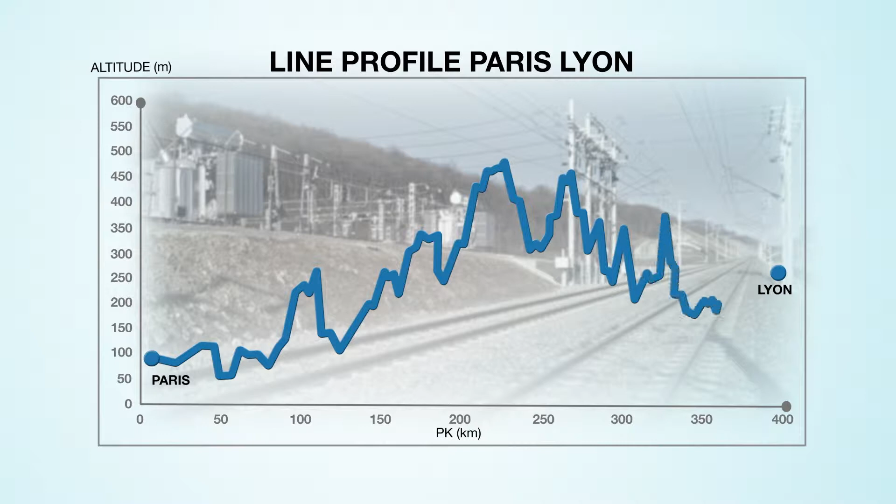French Railways wish to increase the capacity of high-speed line 1, which is between Paris and Lyon. One of the difficulties is that the public power system is weak at the crossing of the Morvan, roughly halfway between Paris and Lyon, and it's not reasonable to build a new substation where the increase of capacity will need it. We wish to increase the capacity of the line from 13 trains per hour to 16 trains per hour, an increase of roughly 3 trains per hour. We hope that better management of the energy available will allow this increase of capacity.

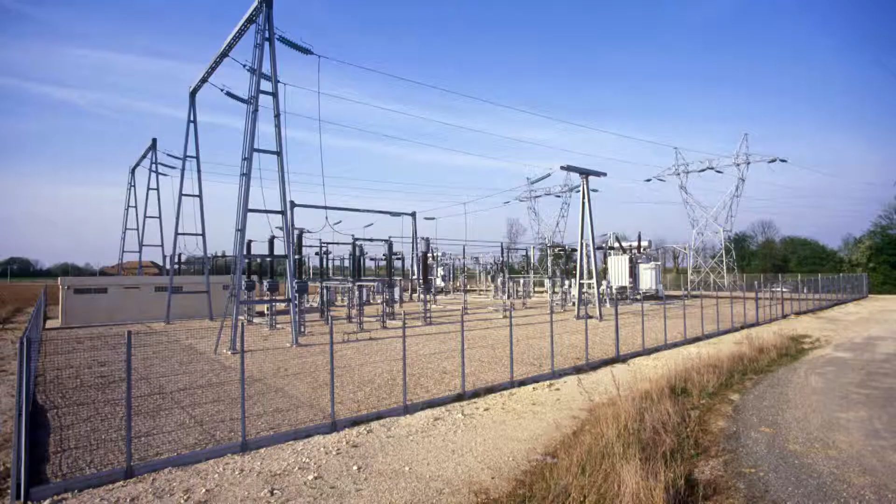A better management is first to use substations with a storage system. The substation will store the energy during the night and reuse the energy stored during peak hours. The second track is better use of the energy available by monitoring the speed of the trains, which will smooth the use of energy. So this is the problem that we address to MERLIN.

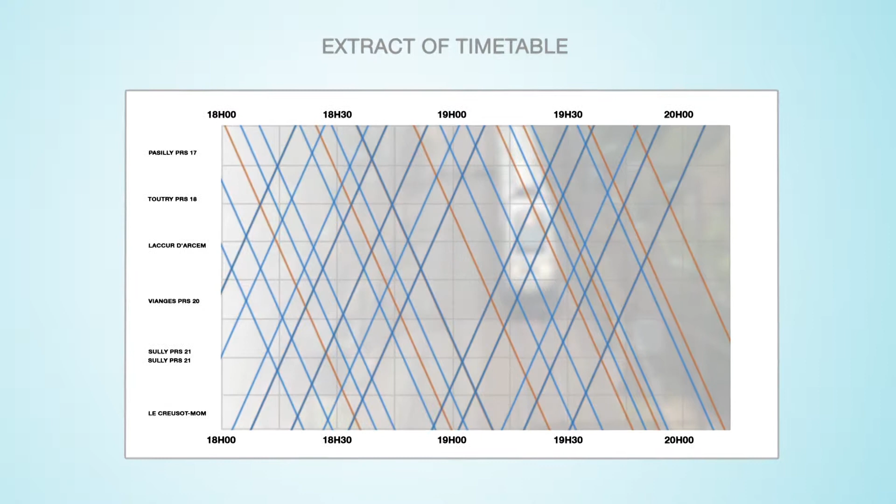The first solution is a software solution which aims to shift a complete timetable of trains in one direction in order to avoid accelerating different trains at the same time. This aims at reducing power peaks and power at substation levels. The second solution is also a traffic management solution using an ATS, automatic train supervision system, which solves conflicts between trains, for example avoiding braking, stopping and accelerating. There are significant benefits when we avoid a train stopping.

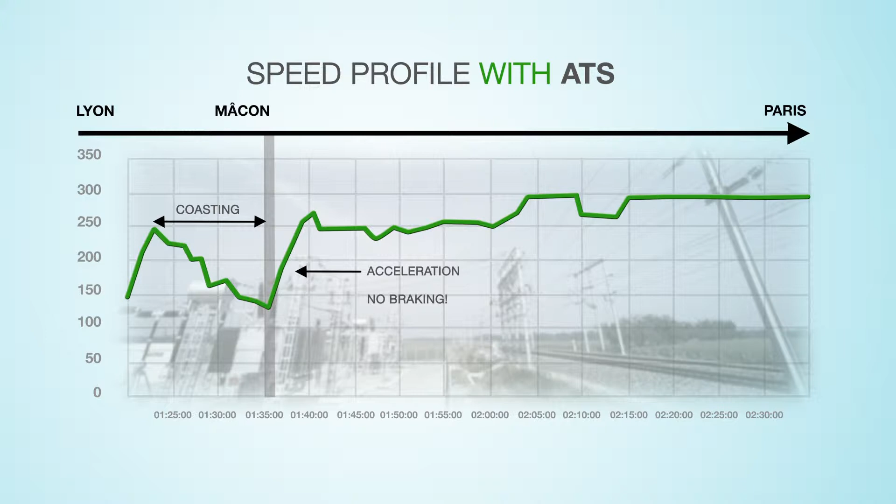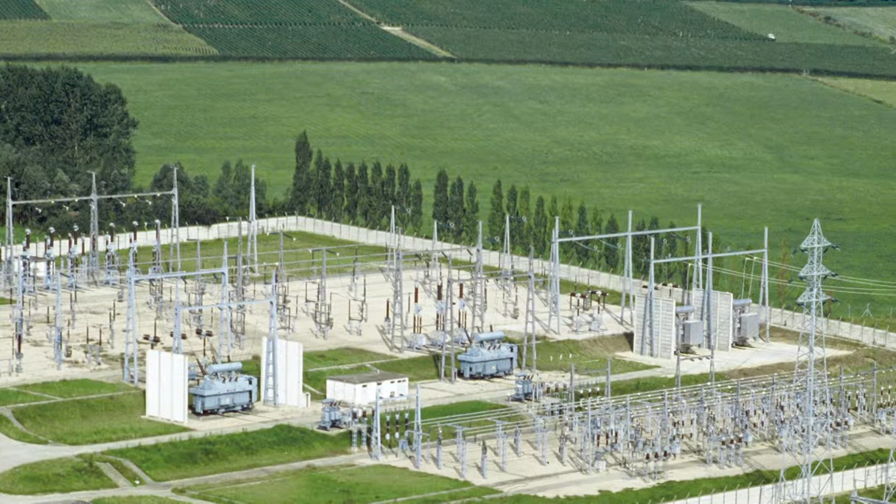The third solution is a hardware solution with the modification of existing substations, adding alternative energy sources like renewables or adding energy storage systems. For example, when we store energy during the night, we can re-inject it into the railway power system in order to reduce power consumption during rush hours. Finally, the three solutions can be combined in order to minimize the energy consumption and reduce power peaks, and thus increase the line capacity.

We are looking at two different problems in MERLIN. The first one is about minimizing losses in the rail power grid. We are examining a line between Malmö and Alvesta in southern Sweden. It's a double-track line with quite heavy traffic, daytime mainly passenger traffic, and during night freight traffic. There are 3 converter stations on the line, and we are seeing that these converter stations are not just feeding the trains near the station, but also over longer distances. This causes losses, and energy costs money. So by changing converter parameters, we hope it should be possible to minimize the losses, and that will be done by simulation by Siemens.

The other line we will look at is from Malmö to Simrishamn with a converter station in Ystad. This is a single-track line with quite heavy suburban traffic. EMUs used on the line have quite high installed power, so we get very high power peaks. But these power peaks are just a couple of seconds long, and the idea is if it is possible to shift these power peaks just a few seconds earlier or later, we can maybe reduce the peaks by 30% or so without affecting the timetable. This way we are hoping that we can lower our investment costs. This will also be done by simulation, and there we will see if it is possible to do that without affecting the trains.

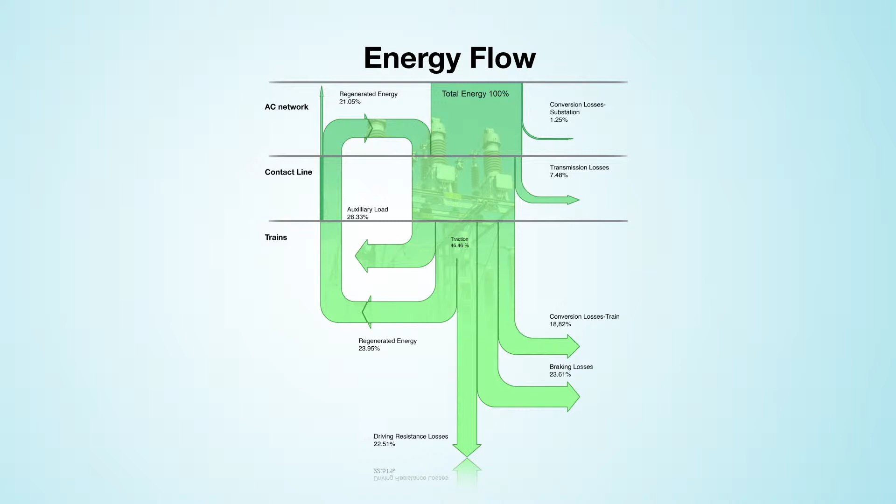For the second task, where we should look if we could reduce the power peaks of the system, we had 2 approaches. One approach was to modify, let's say, the train starts, the departure time of the trains, and the second was to alter the driving profile of the trains, taking into account not to shift the timetable. We already have preliminary results. Power peaks in the substation could be reduced by approximately 20%.

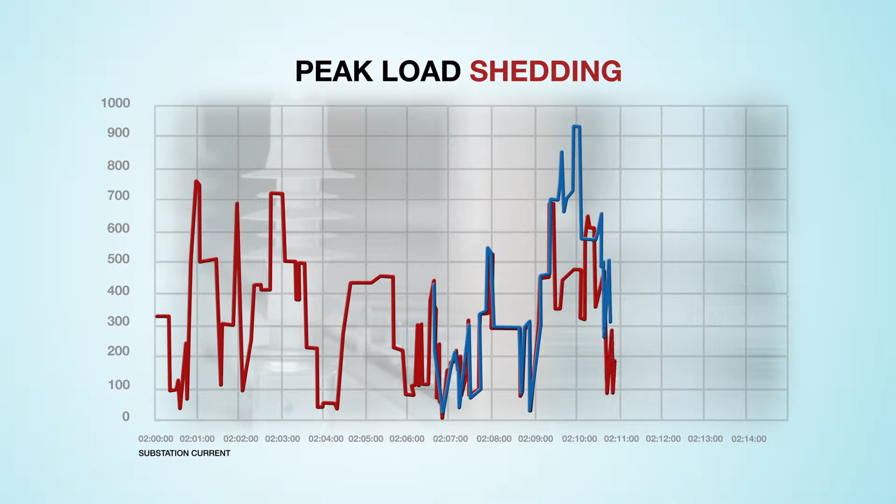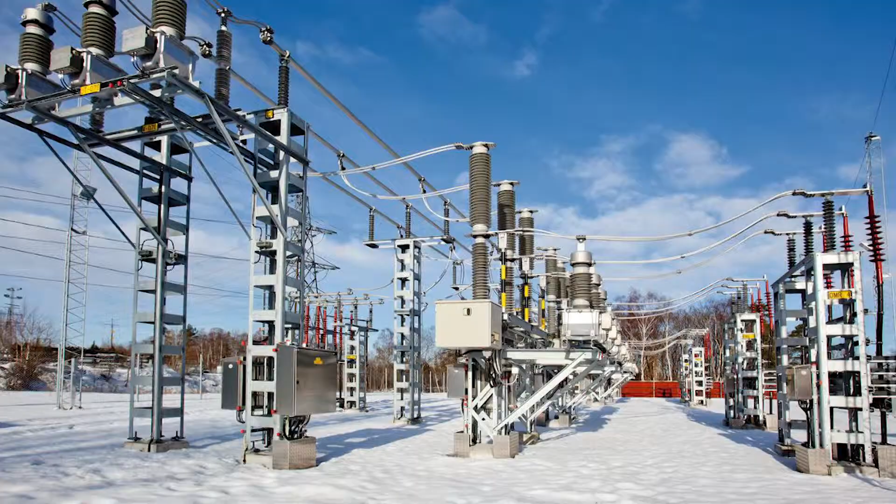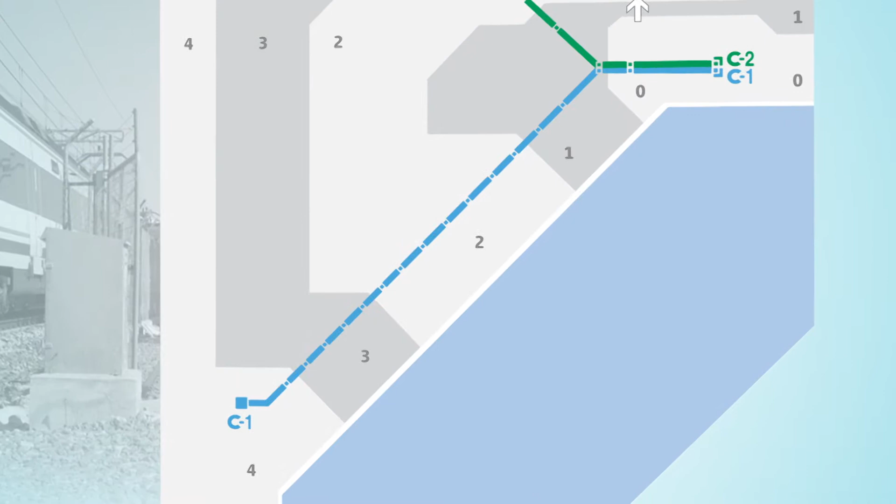The Spanish scenario is formed by 2 different lines. The first line, between Malaga and Fuengirola, is a 30 km length line with single and double track for suburban traffic. The line is fed by 3 electrical substations. The trains, type Civia 464, circulate in a single composition with frequencies of 20 minutes. The first line has 18 stations along 30 km, so trains must stop several times during the journey.

As a result, 2 problems in normal and degraded operation arise. On the one hand, a great possibility to recover braking energy. The problem is that many sections of the lines are single track and the frequency of trains is low. The direct consequence of this is that the energy is not used and must be burned. This line has both single and double tracks. Single tracks means complicated operation because all trains have to be synchronized. Being or not being synchronized has an important effect on the energy consumption.

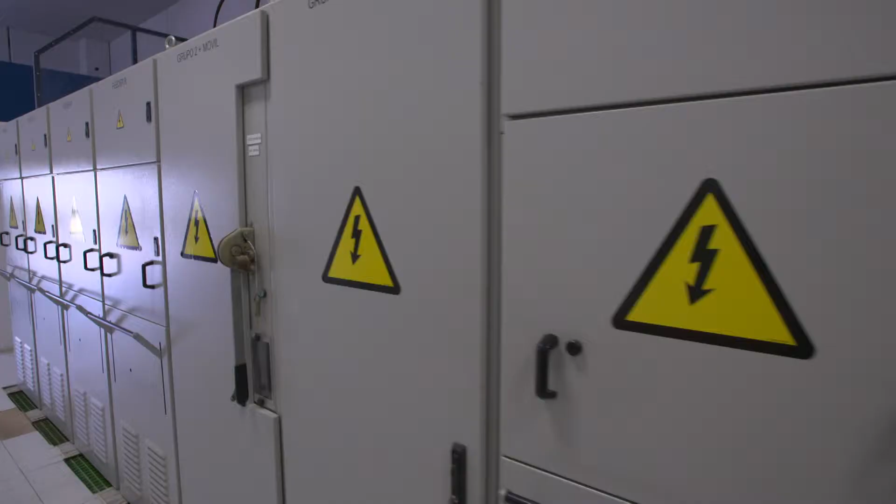Other common problems are the peaks of consumption during the starting of the degraded operation, therefore having terms of contracted power very high and also at a high cost. Therefore, it is necessary to analyze the possibility of placing a storage system in order to reduce, even in degraded condition, those peak loads and also to know the most efficient use of the recovered energy. Another important issue to analyze is the possibility of minimizing the terms of contracted power to reduce cost. That means a direct saving in the energy bill.

MERLIN provides us two relevant tools to solve the issues and fulfill the needs of the suburban scenario of Malaga, namely a strategic decision-making tool and the REMS, the Railway Energy Management System. From the strategic point of view, it was determined that the deployment of energy storage systems could help to reduce the energy consumption, power peaks, and even the contracted power. The strategic decision-making tool was run to find the best combination of a number of design factors, like the energy storage capacity, its location, and the cost, to obtain the optimal results.

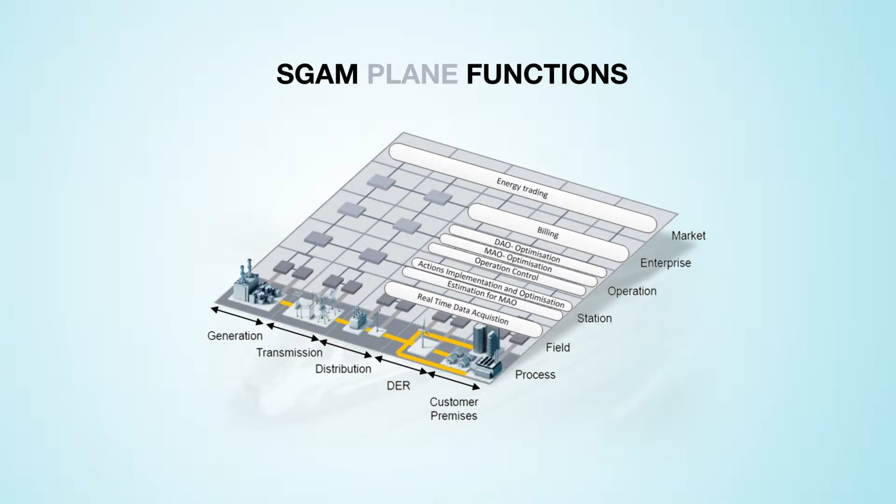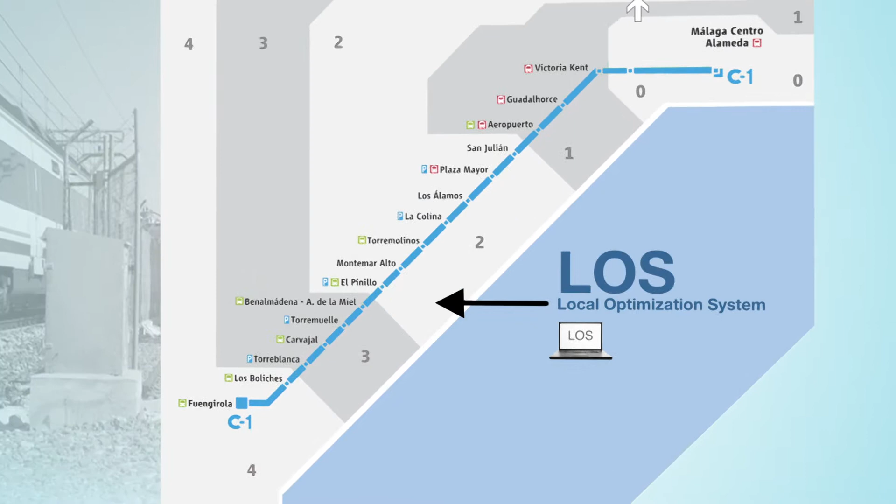From the operational point of view, the solution relies on the REMS. In other words, it relies on the deployment of the rail smart grid proposed by MERLIN. In this case, CAF, supported by ADIF, Renfe, Ansaldo STS and the University of Aachen, implemented a real pilot case in the suburban network around the city of Malaga in Spain. Two of the REMS components were implemented and installed. First, the local optimization system, LOS, governing the area between Malaga and Fuengirola. And second, the Dynamic Onboard Energy Manager, DOEM, mounted on a Civia train, both being connected through the public 3G network.

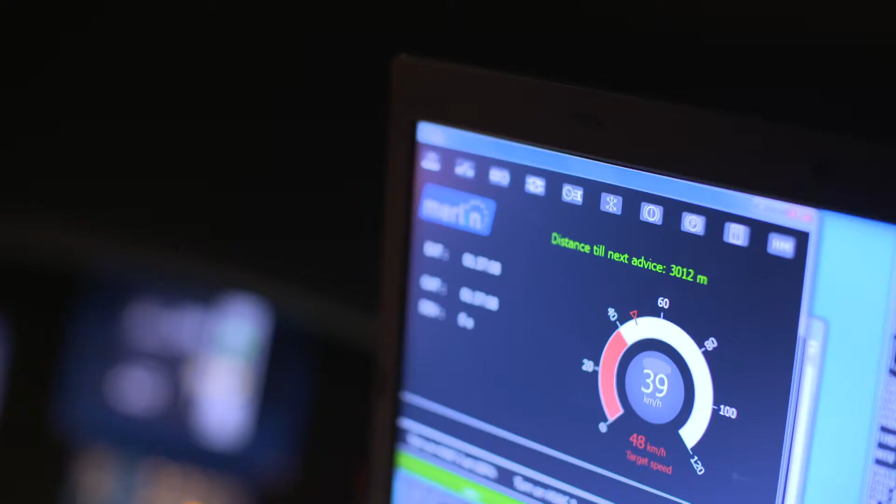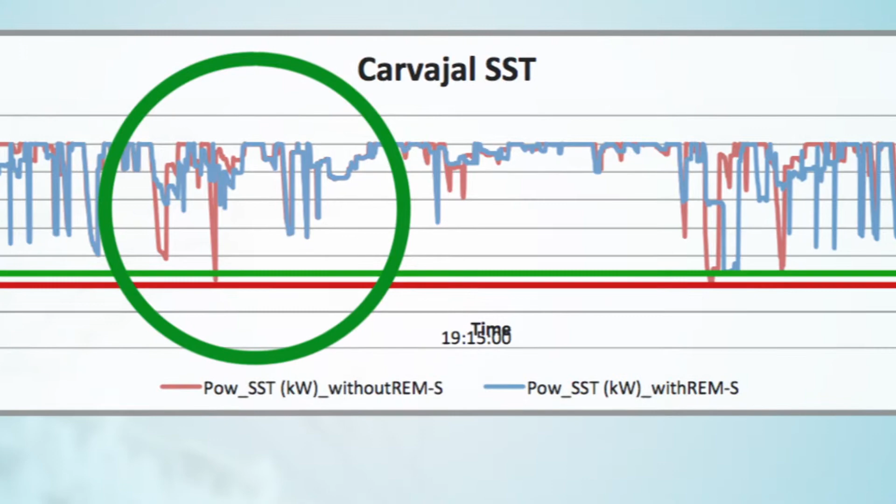The test lasted for 2 weeks and proved the feasibility of the REMS concept and MERLIN's reference architecture. The whole system showed its resilience to the degraded modes, changing the behavior of the agents to fulfill the timetable and the power contract. To sum up, MERLIN has provided a set of solutions for the suburban scenario in Malaga, thanks to its powerful tools, achieving better results than expected in both simulations and real tests.

The West Coast Main Line is one of the busiest mixed-use traffic lines in Europe. 43% of the UK's rail freight uses the line, and we wished in Scenario 4 to focus on a line in the north of England, on the north end of the route.

One of the biggest problems that we face is that whilst lines are being upgraded, there are electrical constraints which limit the number of electrical trains that can operate on a given route or section of line. So what we'd like this scenario to do is look at how, given a particular service pattern, we can best utilise the mixture of diesel and electric services on the line to give us the best energy consumption.

Scenario 4 deals with the West Coast Main Line, and the objective is to find a strategic decision on what is the trade-off between using electrical traction or diesel traction. This will be with the objective to minimize both electrical consumption and diesel consumption within the network, and therefore optimizing the energy consumption.

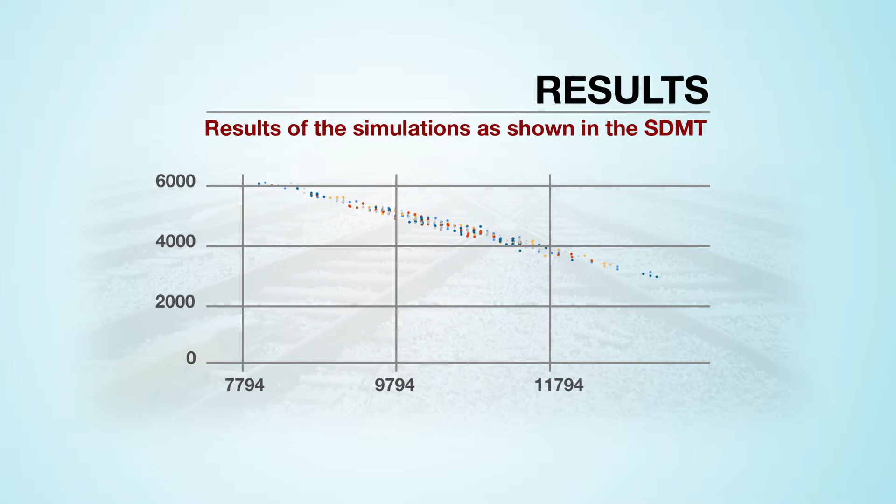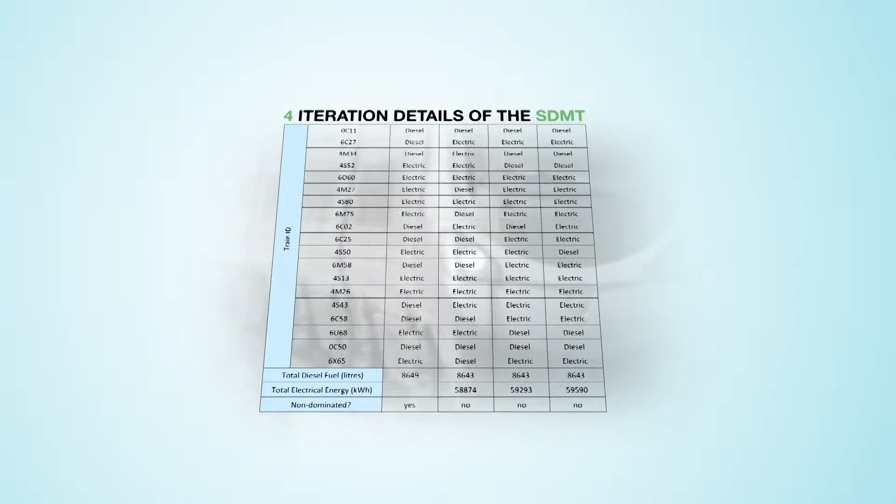We focus on the freight services, which are the only ones that could do this, and we identified 19 of those. Once we plot all the results into the graph, we obtain this Pareto front optimum graph, and that will give you all the necessary information to make an informed decision about the trade-off between electrical traction or diesel traction in these particular services. As an example, we picked some random points on the graph and we looked into the meaning behind all the data there.

And we found, for instance, there was a particular combination of 10 diesel services and 9 electrical services that will give us a lower energy consumption. These results give you proof that we can actually use these sort of strategic tools to make decisions that will allow optimizing energy consumption in a long-term perspective.

Scenario 5 looks at a section of the line in the south of England where we have a large network of 750 volts DC electrified lines which run via a ground-mounted third rail. One of the key questions that we'd like to answer is whether we can optimise, given the space constraints that we have on our network, the location of a substation and its no-load voltage during a renewal.

And what we'd also like to do is then look at whether a REMS could be useful to us in the future to optimise the energy consumption for given trains during periods of a disturbance such as a circuit breaker outage.

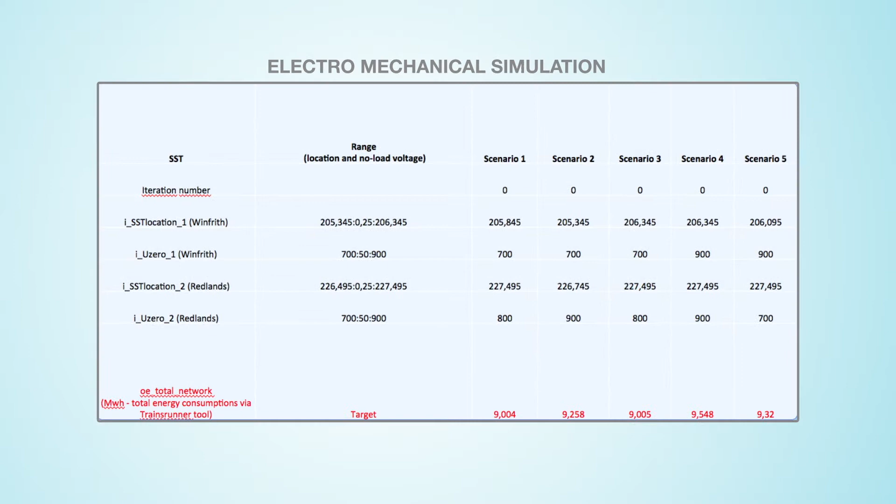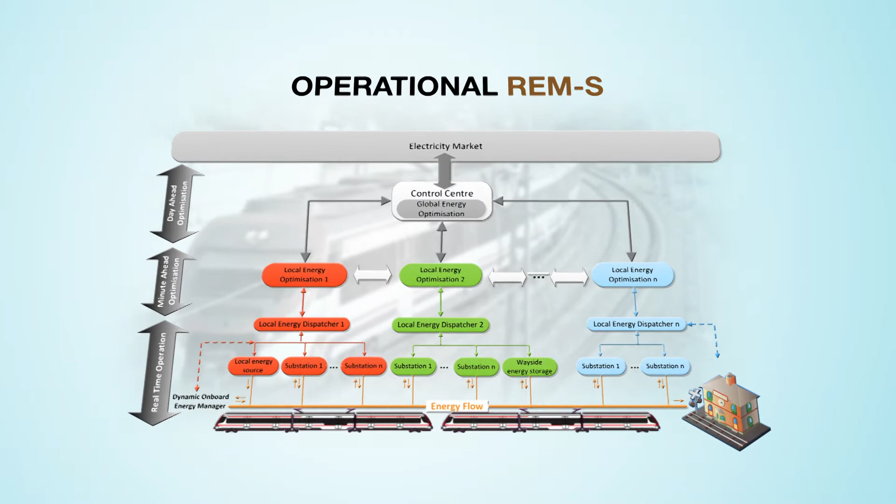After 3.5 years of hard work, MERLIN has come out with 3 main achievements. The first main achievement is the development of the reference architecture of our proposed railway smart grid concept, namely REM-S, including its functions, interfaces, components and protocols, following the CENELEC ETSI SGAM model. To serve as a basis for the energy management systems in the railway domain, we have combined the technical developments with new business models to enable and foster their application.

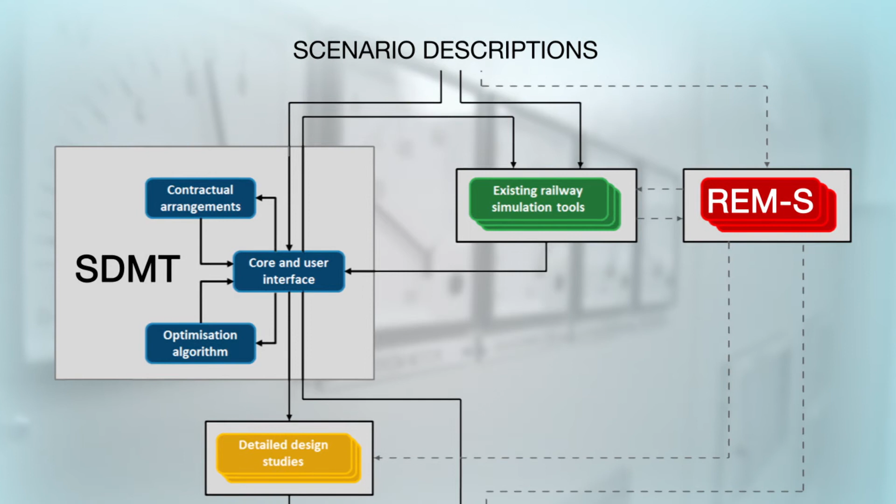The second main achievement of the project is a strategic decision-making tool based on MERLIN's architecture to support the design of the rail smart grid. The tool takes into account the business constraints and suggests modifications for the system layout after analyzing, by simulation, the scenario during a complete running cycle. This closes the loop, allowing MERLIN to become a comprehensive solution for the implementation of an interoperable rail smart grid.

In that sense, the proposed architecture and tools have been evaluated in the high-speed, freight, regional, commuter and mixed freight-passenger traffic scenarios. Significant improvements in subcontracted power, consumed energy and cost have been obtained in most cases.

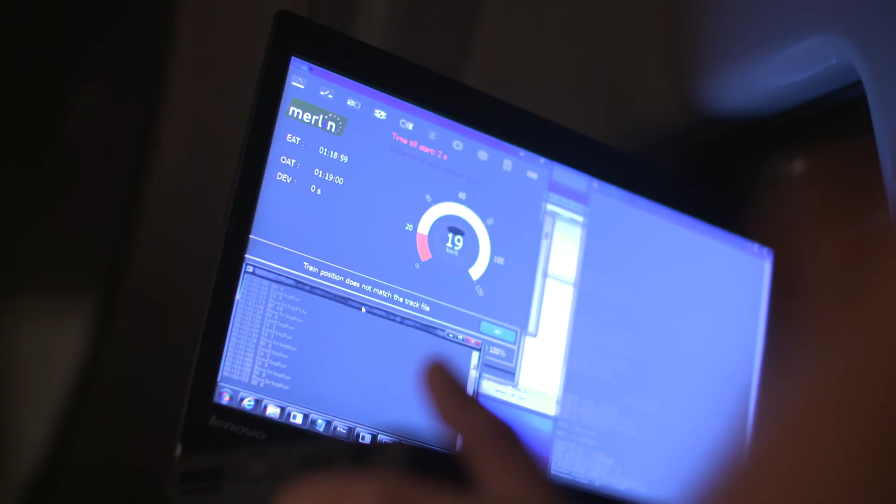MERLIN's third main achievement is a pilot case of this integrated approach that has been deployed in the suburban network of the city of Malaga for its evaluation and assessment, obtaining good results. The deployed components show the potential of MERLIN's concept in real operational conditions.

Last but not least, MERLIN has issued a number of technical recommendations and implementation guidelines to facilitate the market uptake of the project concepts and results. To sum up, MERLIN has pioneered the holistic management of energy in railways. This opens the door for further studies and a system-level demonstrator within future initiatives like Shift2Rail.